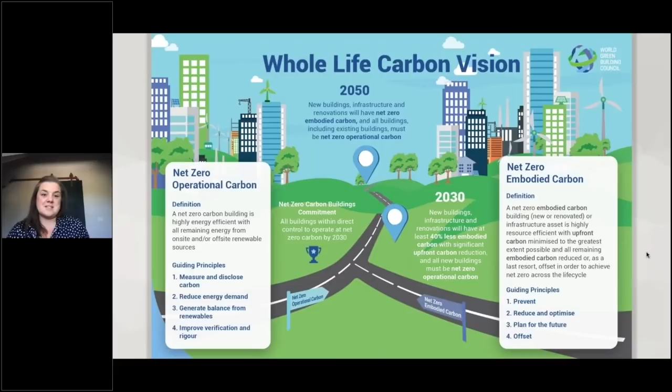Around the world, our green building councils are developing different tools, programs, and resources to help respond to this challenge, taking that framework and its guiding principles and vision and applying it in a way that's relevant to a particular market context—in terms of the types of initiatives, the metrics and target areas, and the terminology used as well.

For example, in the Netherlands there's this concept of Paris-proof, where organizations can ensure their buildings are fit for purpose and future-proofed against future climate scenarios in line with the Paris Agreement reduction targets. There's also LEED Zero from the US Green Building Council, which recognizes a balance of net zero in energy and carbon.

In Singapore, where it's really difficult to achieve all your renewable energy needs on site through solar panels, or to procure it off-site due to lack of availability and land space, they're approaching it through a super low energy concept—reducing the amount of energy consumed by the building as much as possible.

In other markets, they're taking a whole life carbon approach, such as the UK GBC's net zero carbon buildings framework, which ensures there are targets and standards for reducing embodied carbon. Similarly, DGNB from Germany has a climate positive certification program, requiring buildings to set a roadmap for achieving net zero for all associated emissions. But all of these programs work against that framework, so we're bringing in alignment and ensuring they have programs that encourage buildings and the sector towards net zero.

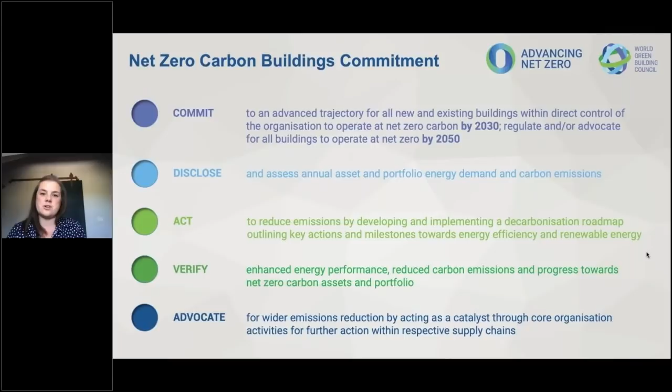We currently have 100 signatories to the commitment, with more being announced this week, and we have detailed guidance available on our website for those interested in signing up. Each organisation and government that signs up creates an action plan setting out the intention to achieve the different components I just set out. We use the Green Building Council network, their rating tools and guidance documents, to help support signatories in achieving their commitment goals.

I've mentioned embodied carbon briefly, and I want to carry on with a quick mention of why that's important. Globally, buildings are responsible for 39% of carbon emissions, broken into 28% for building operations, the use of buildings, and 11% from the construction industry for materials and construction processes in creating and maintaining those buildings. Building operations split into residential and commercial sectors, and into direct emissions created on site through on-site combustion, and indirect emissions from use of electricity from the grid.

That 11% from the construction industry is actually fairly small when considered against the total emissions from the concrete, steel, and aluminium sectors, which are over 22.7% of emissions on their own, broken down into roughly 11% for concrete, 10% for steel, and 1.5% for aluminium.

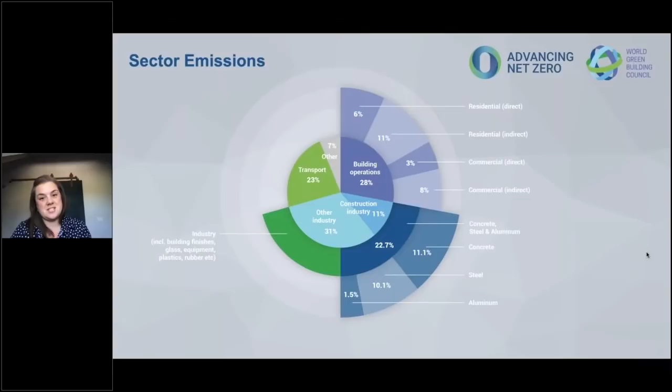Therefore, if we as the building and construction sector, an enormous procurer of these materials, can help create demand for low carbon alternatives, we can have a much greater impact on global carbon emissions than just the 39% our sector is already responsible for. So we will be introducing a whole life carbon commitment pathway to the commitment later this year.

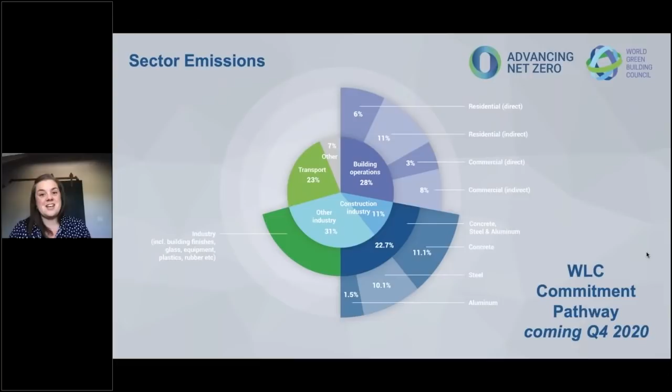This week, we're celebrating World Green Building Week with its theme, Act on Climate, through advancing net zero buildings. We're highlighting the action already being taken by businesses and governments around the world in advancing net zero buildings, and why net zero buildings are important for communities, for the planet, and for economies.

It is time to tackle the climate crisis, to rise to the challenge, to overcome the hurdles for a more resilient tomorrow, and net zero buildings are the solution. So this World Green Building Week, learn how we can take action across our sector, share the message about net zero buildings and the materials you can find on our website, and lead on climate action.

Show how you as an organisation or yourselves are advancing the sector towards a net zero future. Our web address is here for World Green Building Week, and we still have some time for you to get involved this week.

Going into more detail around the campaign: net zero buildings for communities. Net zero buildings support a healthier and more sustainable built environment, creating thriving and resilient communities, and when it comes to creating those communities, urgent action is long overdue. For the planet, buildings account for more than one-third of global carbon emissions. Net zero buildings dramatically reduce energy demand and use renewable energy sources. It's vital we prioritise net zero buildings today to protect our planet and future generations.

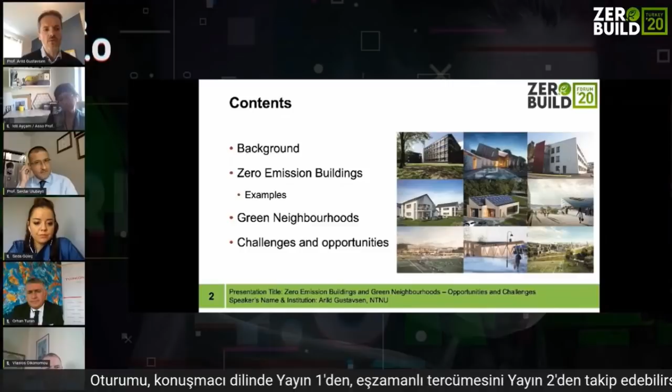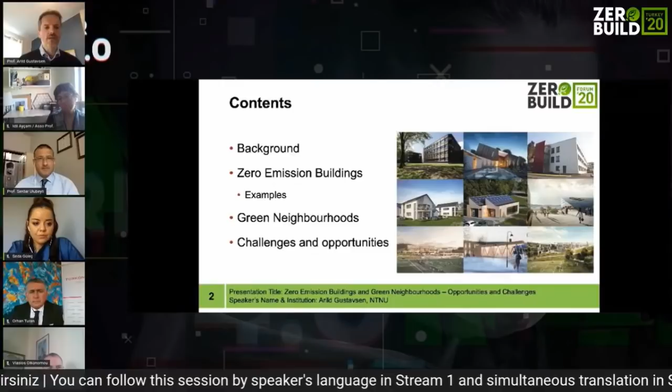The contents of my presentation: first I'll give a bit of background, which has partly already been introduced. I'll talk about the work we've been doing on zero-emission buildings and give a couple of examples, then touch upon green neighborhood concepts with some examples, and end with thoughts on challenges and opportunities.

So why do we work on zero-emission buildings and zero-emission neighborhoods? As presented earlier, buildings and the building construction sectors combined are responsible for 36% of global final energy consumption and nearly 40% of total direct and indirect CO2 emissions. The numbers vary from source to source, but if you include upstream energy and material production, it can be quite substantial anyway.

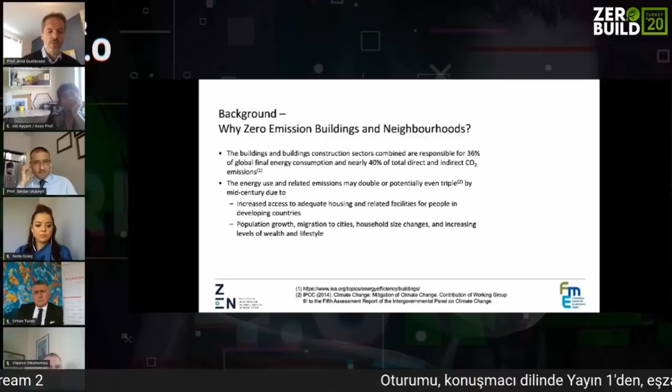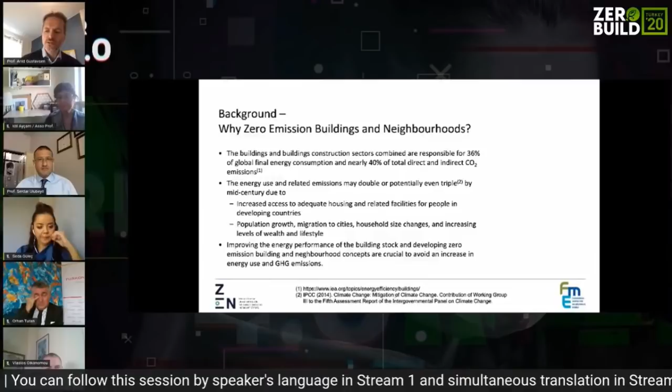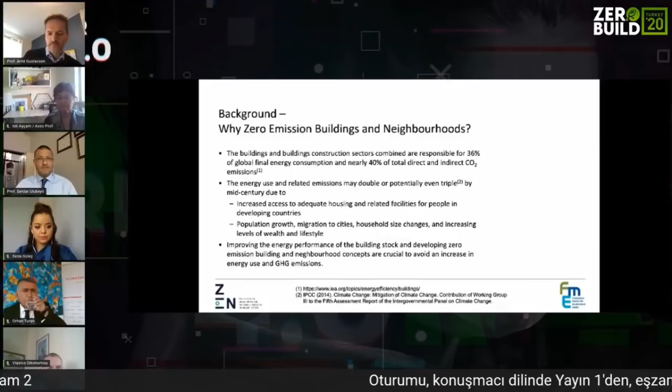We know the current numbers, but looking at the future, the energy use and related emissions may double or potentially even triple by mid-century. This is due to increased access to adequate housing for people in developing countries, population growth, migration to cities, household size changes, and increasing wealth and lifestyles. So improving the energy performance of the building stock and developing zero-emission building and neighborhood concepts are very important to avoid an increase in energy use and greenhouse gas emissions.

This relates a lot to the UN sustainability goals, and several are relevant here—for instance, affordable and clean energy for all. When you aim for a zero energy and zero emission concept, we know we need to invest in renewable energy production, usually close to the building, on the building site, or on the building itself.

We touch upon sustainable cities and communities. A lot of our buildings are in cities, and there will be an increase in the number of people living in cities. We need to increase the number of built houses in a sustainable way.

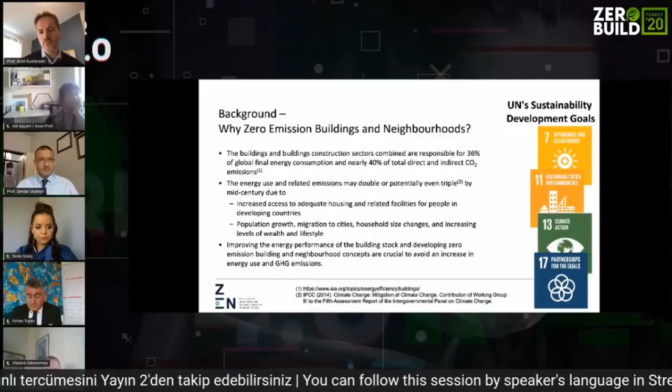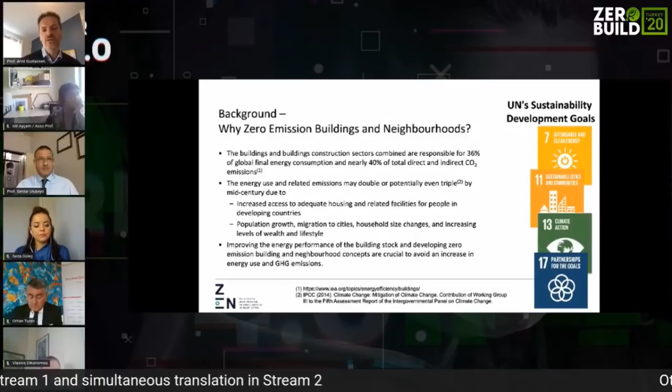And of course climate action—this connection is very clear—and also partnerships for the goals. Making one building includes partnerships across different disciplines, but making zero-emission neighborhoods or a sustainable city touches on very many areas like municipalities, consultants, the building sector, and the energy sectors. You need collaboration among all these actors to arrive at the wanted environmental ambition.

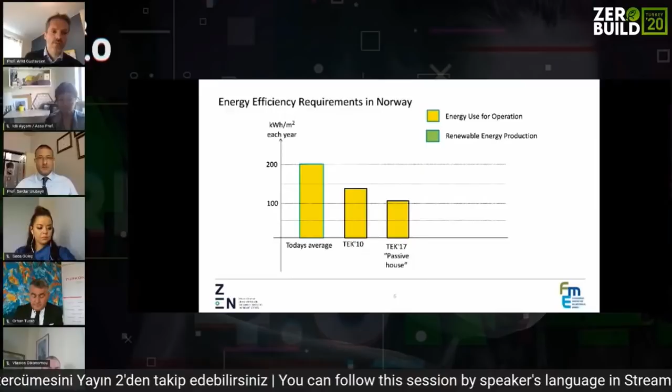Looking at what's going on in Norway, today's average energy use in buildings is around 200 kilowatt hours per square meter each year. The technical regulation in 2010 aimed for below 150 kilowatt hours per square meter per year. In 2017, we introduced what's called passive house level, close to 100 kilowatt hours per square meter per year. And in 2020, which is now coming to an end, we will soon have the nearly zero energy ambition level.

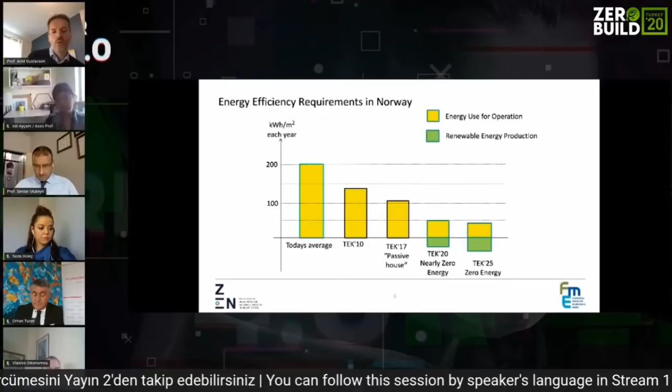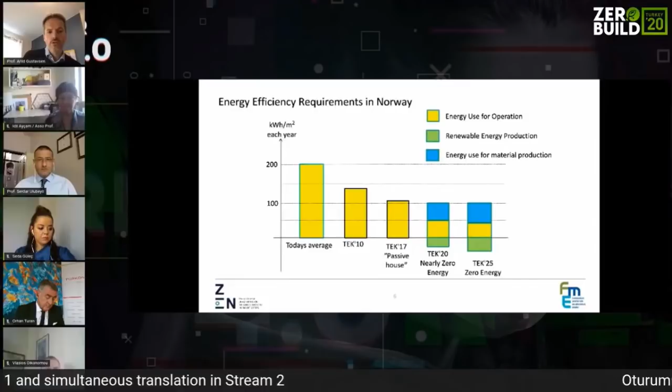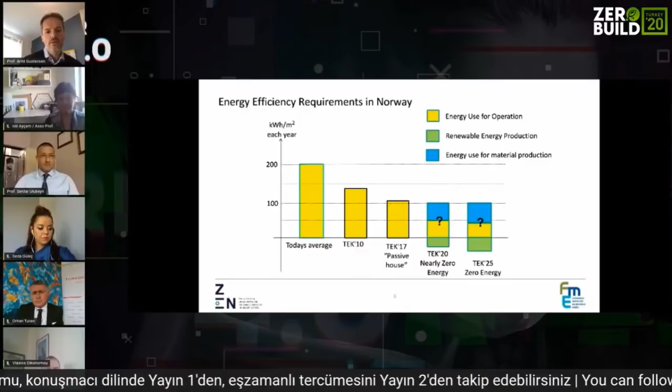...pointed by the European Commission, and maybe in 2025 we might end up with a zero energy ambition level. But so far, most of these requirements, at least in Norway, have been on energy use, usually only operational energy use. If you look at the energy used in making the materials, the picture might be a bit different. Still, at least in Norway, it remains to be seen exactly what these definitions will be, also for this year.

Since we think the embodied emissions, the energy use, and the emissions going into making the materials and constructing the building are just as important, we've been working on the zero-emission building concept. The main concept is that renewable energy sources produced or transformed at the building site have to compensate for CO2 emissions from operation of the building and for production, transport, and demolition of all the building materials and components during the life cycle.

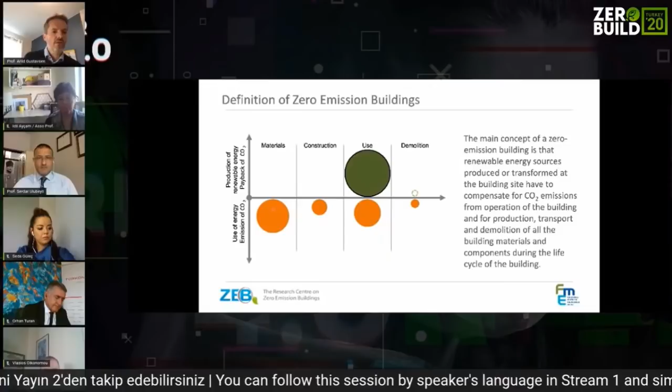That means emissions related to materials, construction, use phase, and demolition phase. For energy efficient buildings with renewable energy production integrated, like PV, we often see that the material emissions are of the same magnitude as the operational emissions, or that material energy use is on the same magnitude as the energy used for operation.

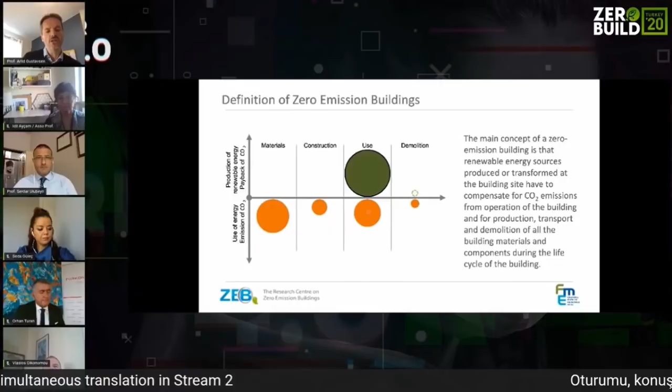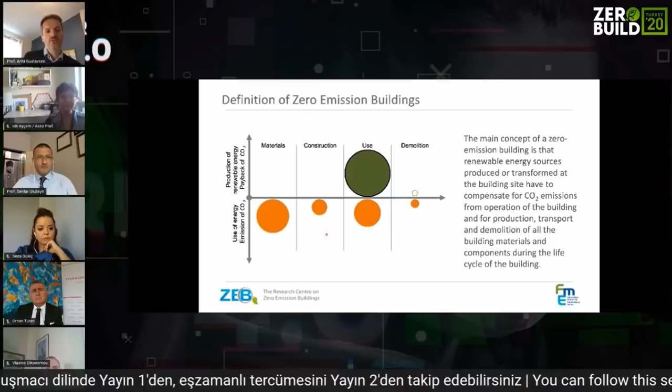So looking at the whole life cycle becomes really important to make sure we also work on the material side, the construction side, in addition to the operational side.

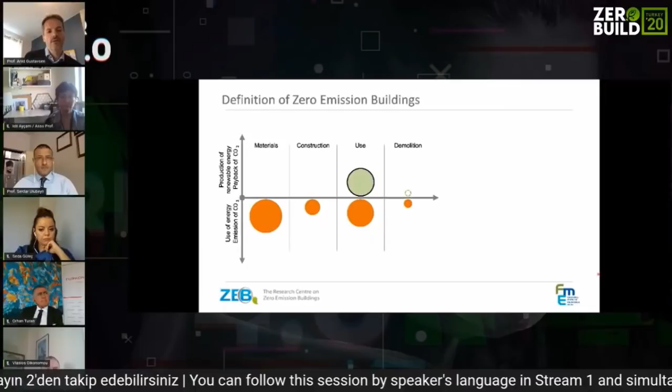We have developed different ambition levels. This is showing one of those, depending on how much renewable energy production we can have on the building. What's shown here is the zero emission building in operation, where we have renewable energy production of the same magnitude as we need for operation of the building.

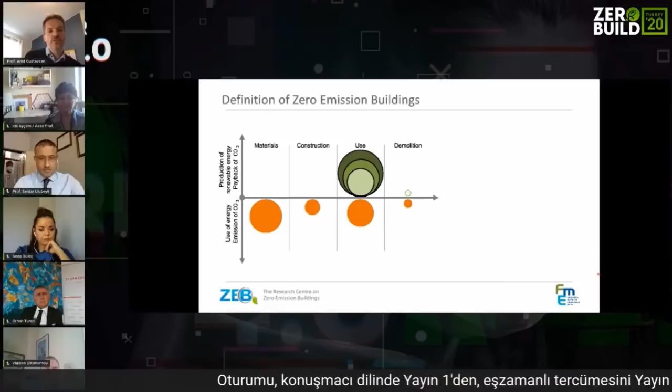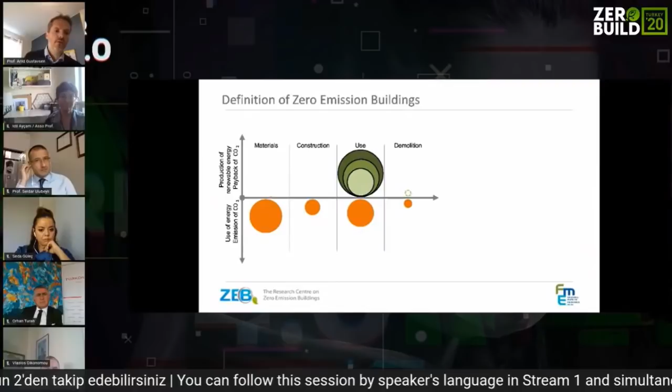If we're able to include more renewable energy production on the building or on the building site, we can have a more ambitious requirement. The ultimate aim is to have renewable energy production compensating for all the emissions related to the whole life cycle, including maintenance of the building.

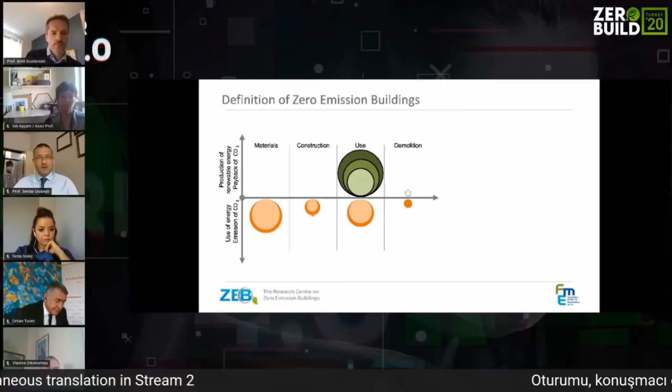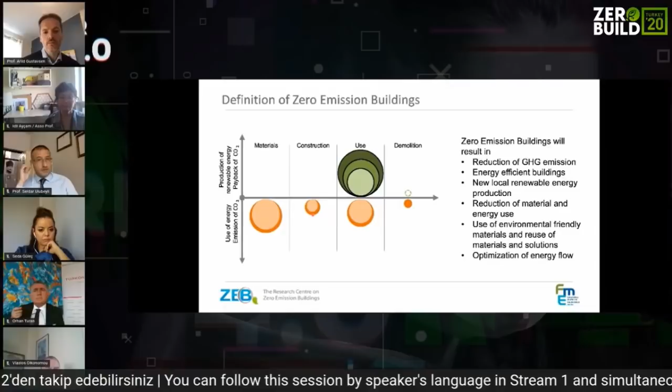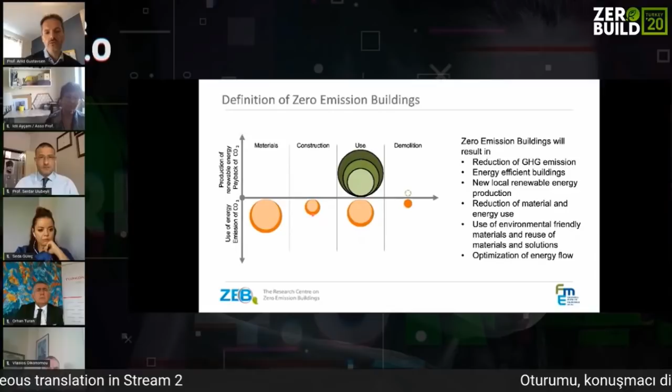So if you use this zero emission building definition, we will have a reduction of greenhouse gas emissions, energy efficient buildings, new local renewable energy production on the buildings or nearby, reduction of material and energy use, and also promote the use of environmentally friendly materials and the reuse of materials and solutions, and optimization of energy flows.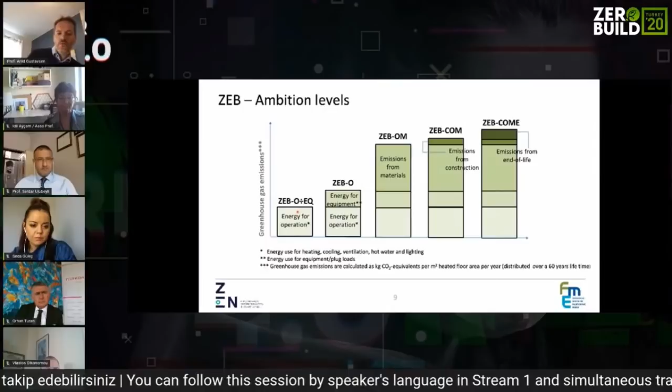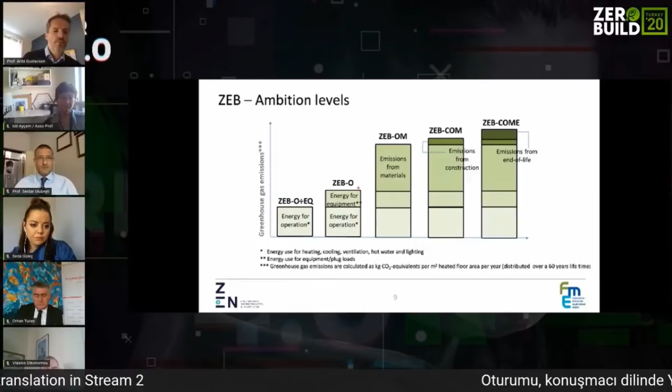This way of defining zero emission buildings also helps the construction industry improve the energy requirements or environmental requirements as they learn more about how to plan a building like a zero emission building.

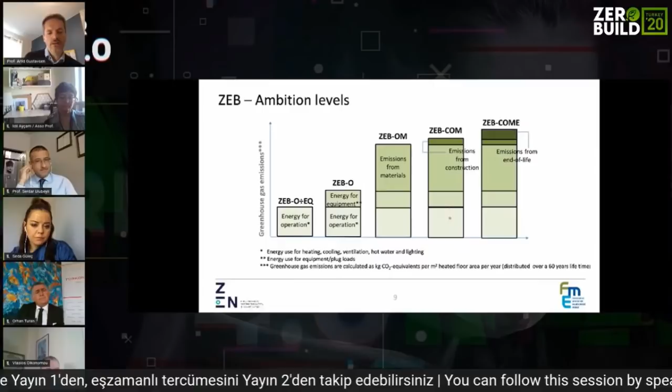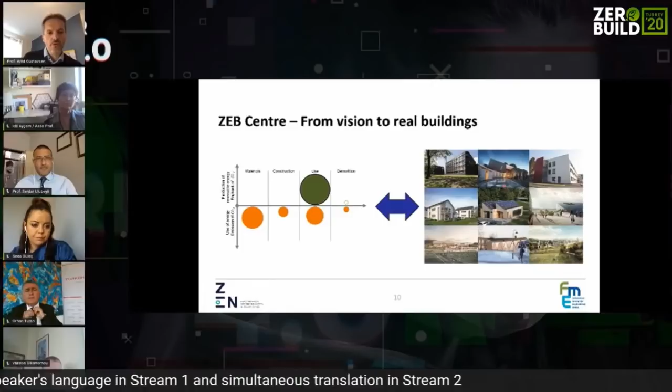This is not only theory, it's also applied in real demonstration projects. Right now we have been working with industry and developed 8 of the 9 projects shown here — office buildings, residential buildings, and school buildings. I will give two examples.

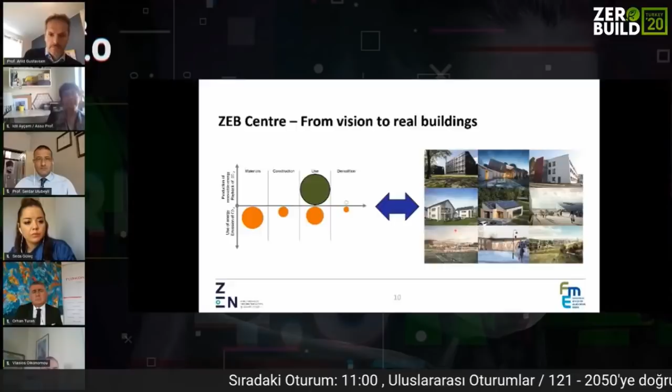The first is the ZEB pilot house in Larvik, south of Oslo in Norway. It's a demonstration building, designed by architect Snøhetta, with owners being a company dealing with technical systems for buildings. Looking at the ambition level here, it is zero emission buildings including operation and materials.

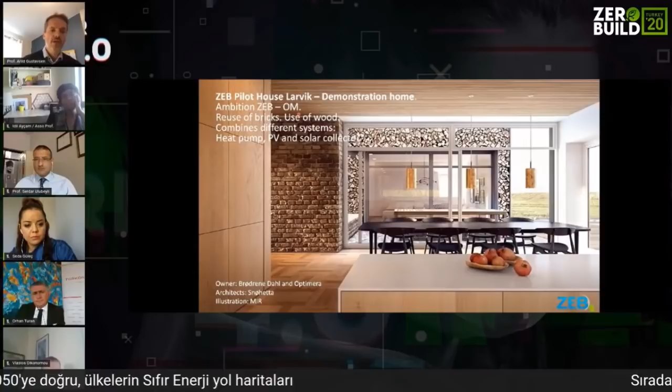To obtain this ambition level, they used a lot of wood and reused materials, for instance the bricks — I'll get back to that. In addition, they combined different systems: heat pump, photovoltaics, and solar collectors.

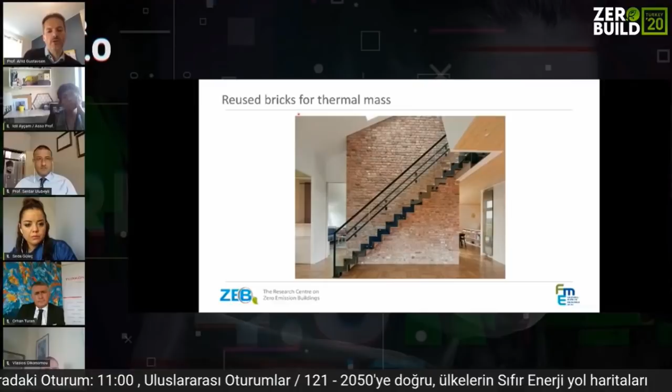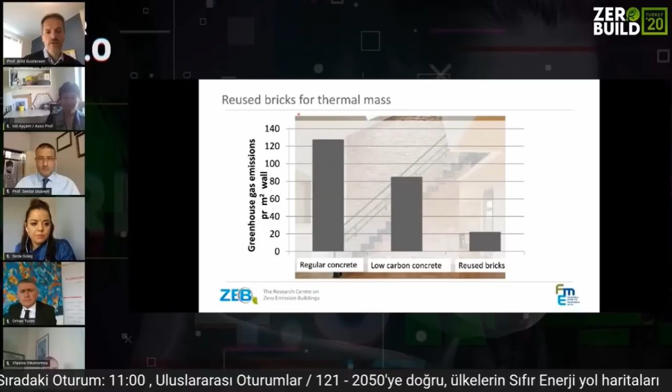For instance, the architect and owner wanted thermal mass in the building. The first concept was regular concrete added to the core of the building, but calculating toward the zero emission building operation and material emission level, they found this contributed too much to the material emissions. They then looked at low carbon concrete as an alternative, but in the end used reused brick sourced from a barn nearby that was being taken down anyway.

In this way, by focusing on emissions during the whole life cycle of the building, they managed to reduce the emissions to the environment.

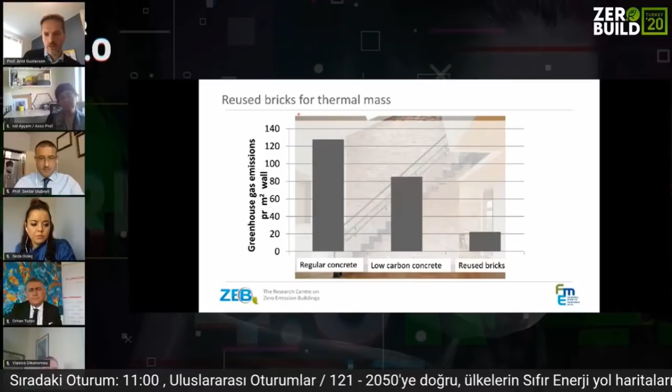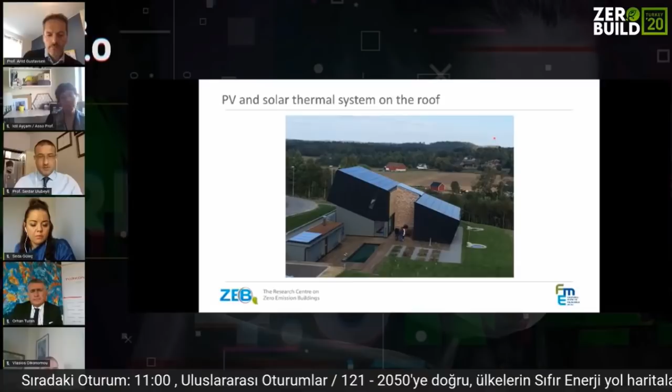This needs to be like this because we have to compensate during the lifetime of the building. In the calculation procedure, we define the lifetime of the building, or the life cycle time, as 60 years.

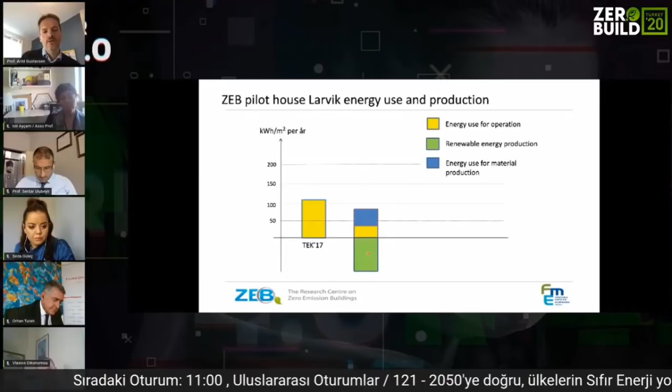Another building, this was a renovation project of an office building from 1980. It originally had an aluminum facade with a lot of glass.

After renovation, they ended up having more wood in the facade and burnt wood to take down the embodied emissions further. All in all, they here aimed for what they call a zero emission building with operation and materials, taking out the user equipment. So here they used exposed concrete as thermal mass to limit the temperature fluctuations.

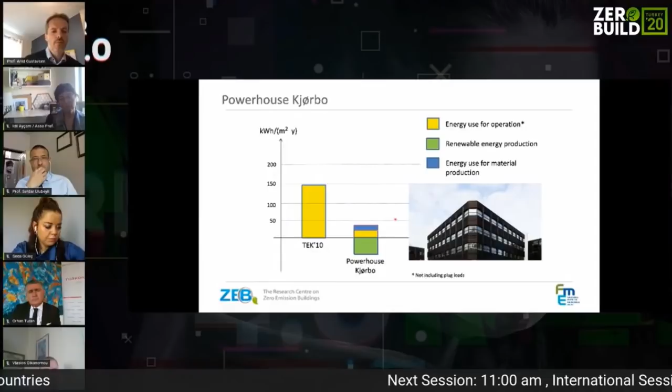They have a lot of photovoltaics on the roof, both on the roof of the building itself, but also on part of the parking garage that belongs to the building. In this way, they're able to produce enough renewable energy to compensate for operation of the building and also for taking into account the materials.

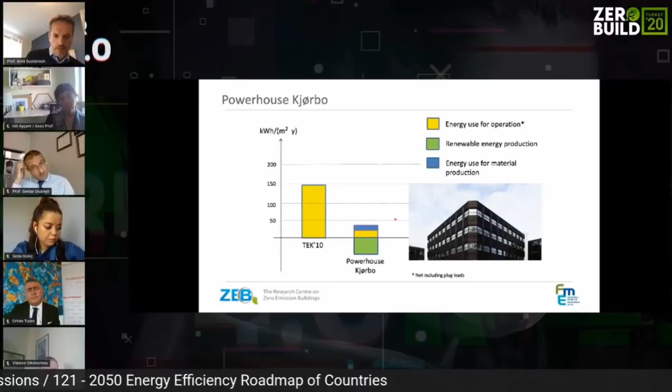That was two examples. Then I will show two slides showing what the result can be if we implement zero emission buildings in the technical regulations and look at scenarios towards the future.

This graph shows the built square meter floor area in the Norwegian building stock, starting at 2020 and looking into the future to 2050. We see that there will be an increase in the built area over the next 30 years.

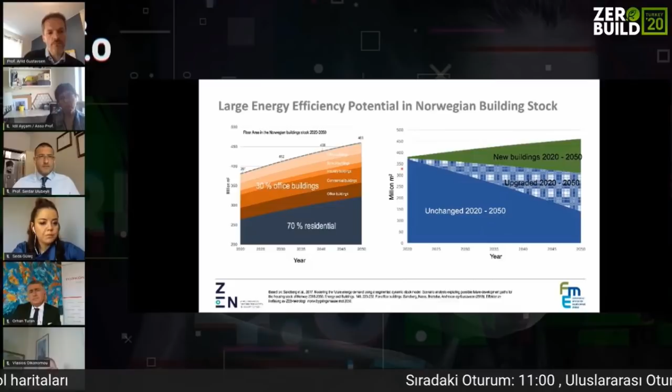If you look at what this will do to the building stock, some of these buildings will be unchanged because they are new or built quite recently, some will be upgraded, and some will be new buildings built according to the technical regulation at different future times. Then we can calculate the energy performance of the whole building stock into the future.

We did that by looking at three scenarios: a baseline scenario using the current energy performance requirement and improving it slightly; a ZEB scenario where we implemented some of these zero emission building concepts into future energy requirements; and also a really ambitious scenario.

If we see at the results, we can see that energy use in the Norwegian building stock can be almost 40 terawatt hours less in 2050 compared to 2020. The ZEB definition itself that we have proposed can contribute 31 of those 39 terawatt hours.

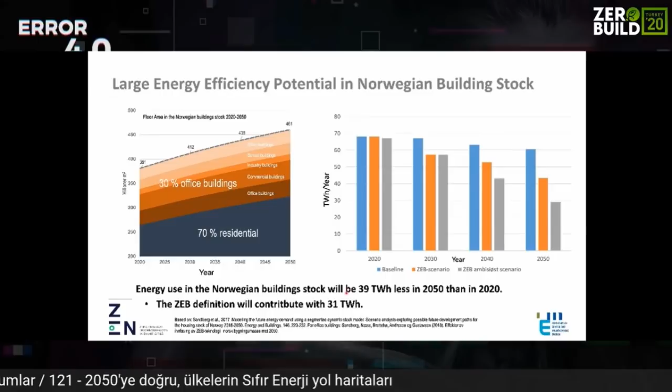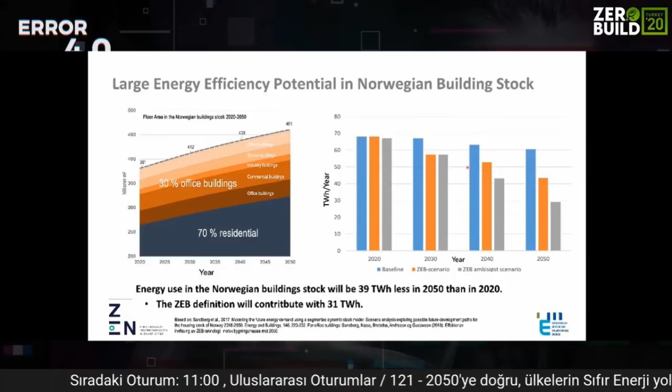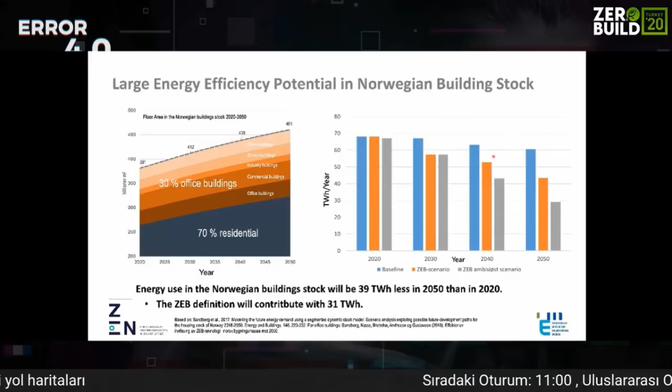There is a big energy efficiency potential and also a potential for implementing renewable energy technologies in the building stock. Even with an increasing population and increasing built floor area, we can have a substantial reduction. This freed up energy can be used in other sectors like the transport sector, if we electrify the transport sector, moving from fossil fuel to electricity, or it can also be used in other areas.

And then I changed to the neighborhood scale. I think I have 2 or 3 minutes left.

Recently, in 2017, we started to work on the neighborhood scale, because we see that working on one individual building might not be optimal. It's better to look at a group of buildings and to look at synergies. Today, we usually cool one building while we can heat the neighboring building. So the best thing would be to use the surplus heat in the building where you need this heat.

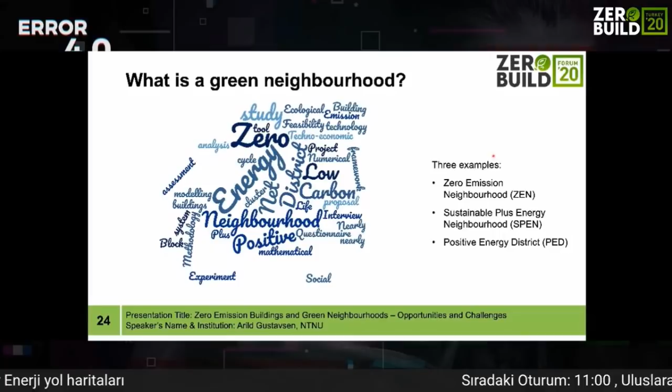So I'll just show briefly 3 examples of how this can be defined. One is coming out from the Zero Emission Neighborhoods Center, where we have developed this research center definition.

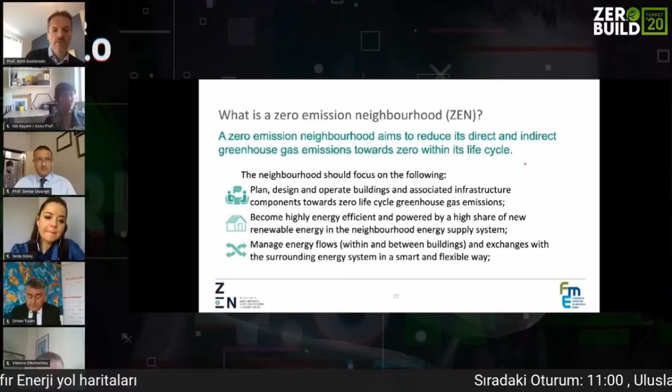Instead of having a zero emission building ambition, building for building, we have an ambition of having a zero emission neighborhood. We still look at the direct and indirect greenhouse gas emissions throughout the life cycle of the building. We aim to have zero life cycle greenhouse gas emissions. The neighborhood should become energy efficient and powered by a high share of new renewable energy.

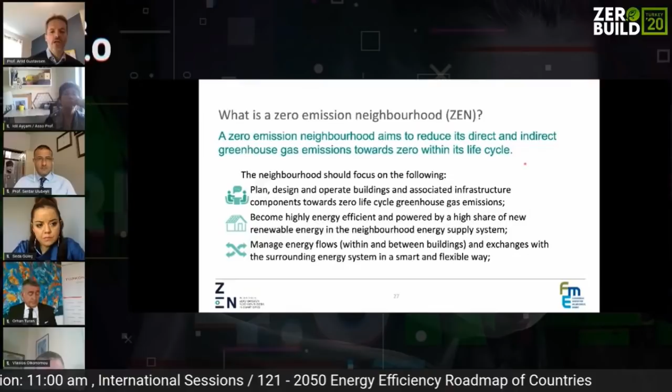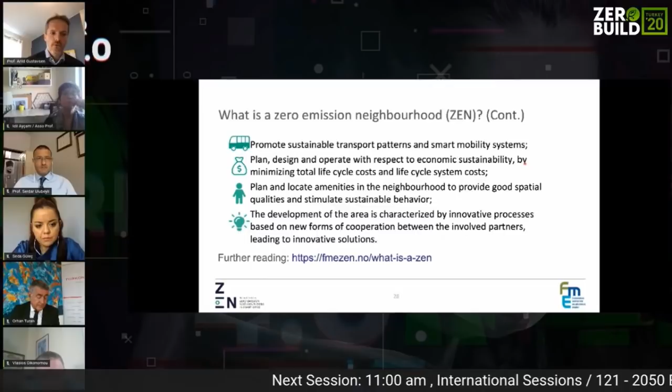The neighborhood energy supply system needs to manage the energy flows and also exchange energy with the surrounding system in a smart and flexible way. We should promote sustainable transport patterns and smart mobility systems. We should plan, design and operate with respect to economic sustainability, and locate amenities in the neighborhood to provide good spatial qualities and stimulate sustainable behavior. We need to have the users, or citizens, of these neighborhoods with us, of course.

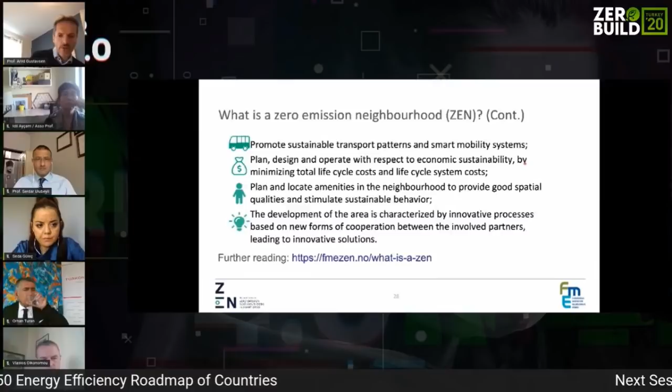We should also look at innovative processes as part of this. So we're now testing out this definition in several areas in Norway, working with municipalities and property developers. I also have two other examples, one connecting to an EU project.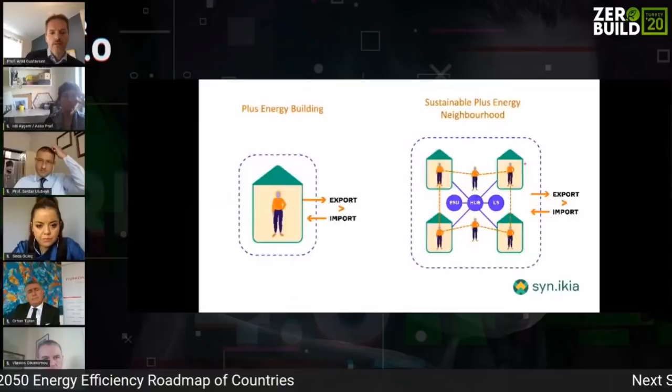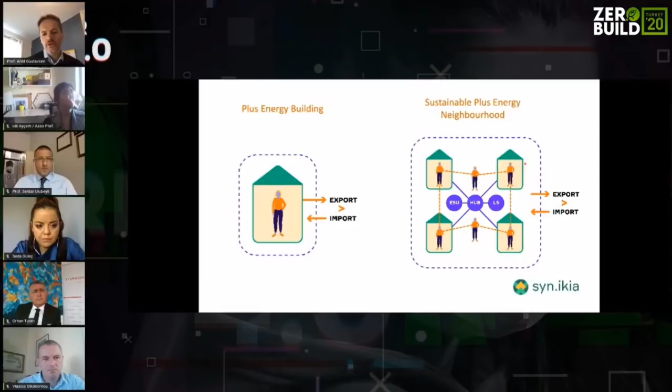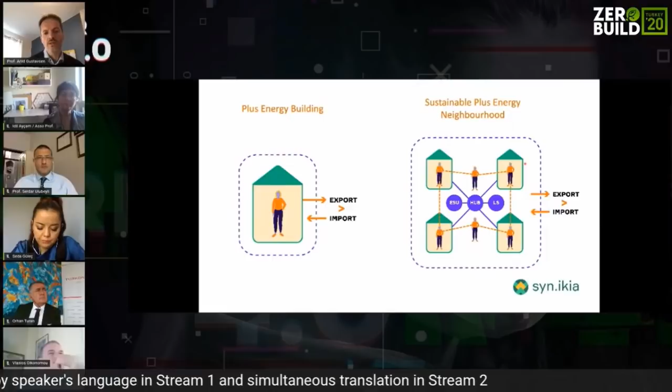Here the main mission is to increase the share of sustainable neighborhoods with surplus renewable energy. The focus is on energy, but instead of looking at the individual building, we also look at the neighborhood scale. Then you can have neighborhood storage systems or neighborhood energy supply units, and exchange of energy and control of energy use among the buildings. The export of energy then needs to be larger than the import to obtain the ambition level.

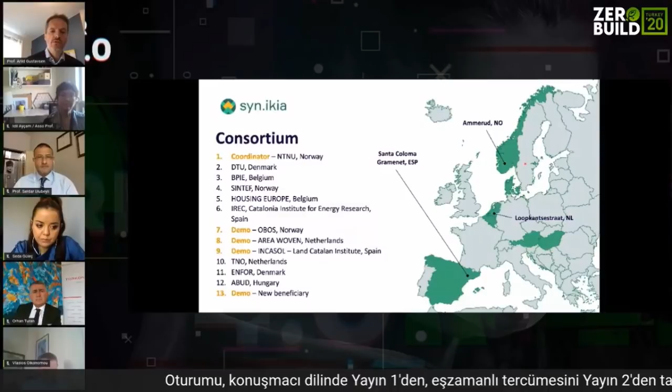This project is also working towards real demonstration cases, one in Norway, one in the Netherlands, one in Spain, and one in Austria.

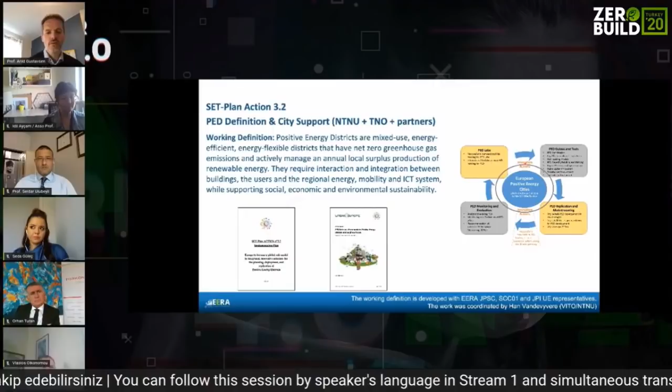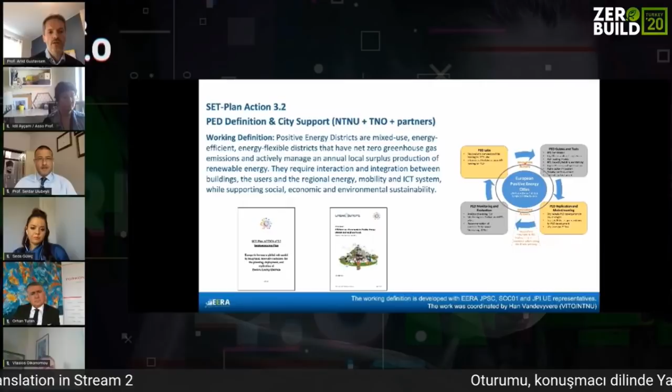Finally, one example is coming from the Strategic Energy Technology Plan, and one of the topics covered there is smart cities and communities. The aim is to support planning, deployment, and replication of 100 positive energy districts by 2025. If you look at the details, the definition touches upon several of the same topics as we saw for the Zero Emission Neighborhood Research Center: mobility, energy, renewable energy, smart controls, and it should also support social, economic, and environmental sustainability.

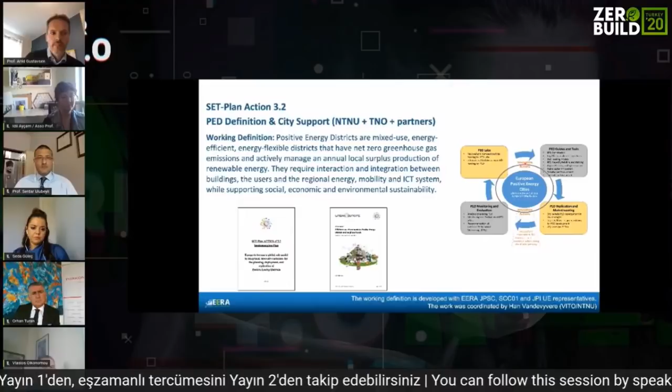I think I've almost used my time. Final slides. But there are, of course, several challenges when realizing green neighborhoods. We are working with different parties in the neighborhood - for instance, owners and developers - and these actors will have different environmental ambitions. So this is a challenge.

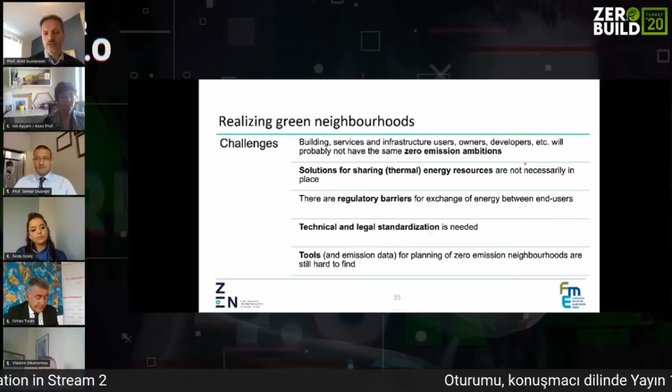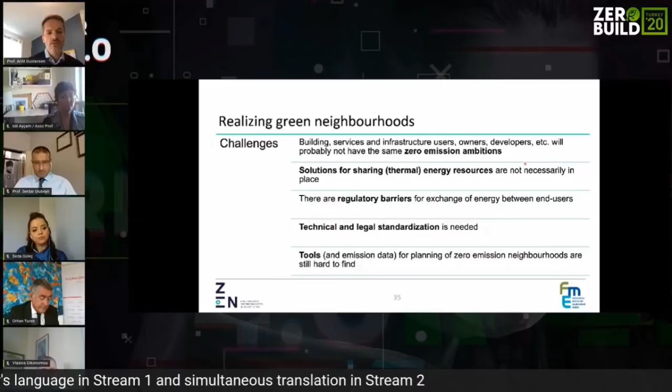Also, there are not systems in place for sharing energy sources like electricity. You can easily share as long as the policy measures are in place, but thermal energy is not that easy if it's not there from before. There are also a lot of regulatory barriers in place, and we see that even in Norway for exchange of energy between end users. Technical and legal standardization is also needed to make this happen.

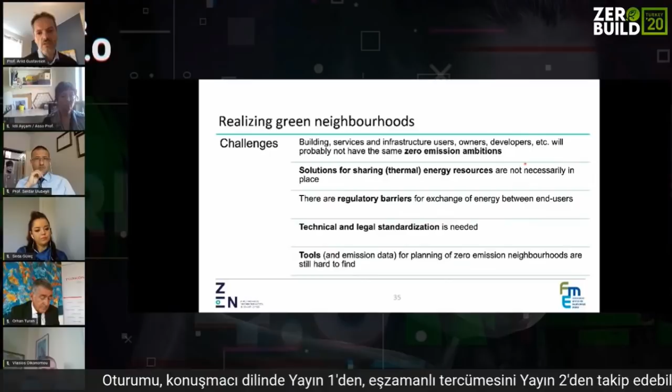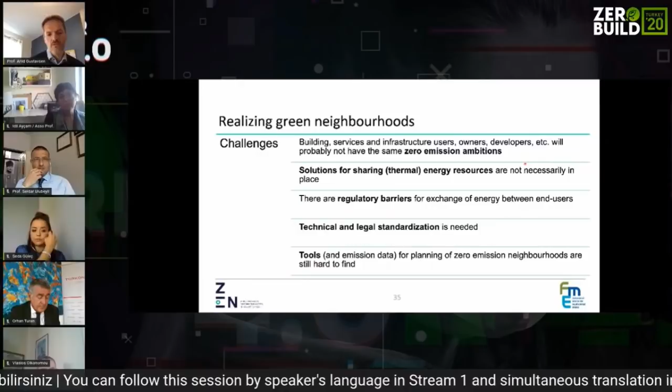Also, the tools for calculating greenhouse gas emissions are not easy - they're not easily available at the moment. We start to get a lot of data for buildings, but for infrastructure and energy systems it's still lacking to a certain extent. But at the same time, there are a lot of opportunities.

We can optimize the energy use and renewable energy production among different buildings and also toward the energy system. Focusing on the neighborhood instead of individual buildings makes sure emissions related to infrastructure - like grids, technologies for water, sewage, waste, and mobility - are also considered. So it's not only the building, but you take into account infrastructure connecting the buildings.

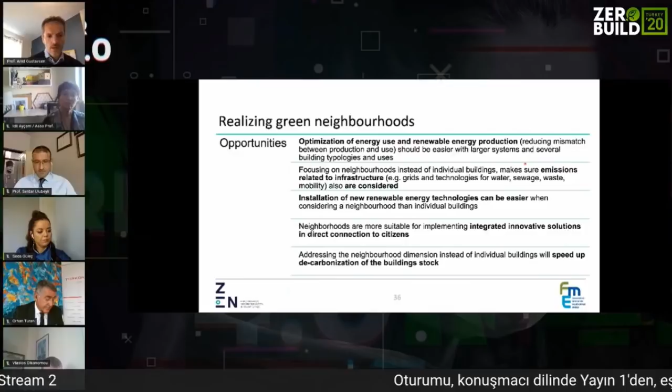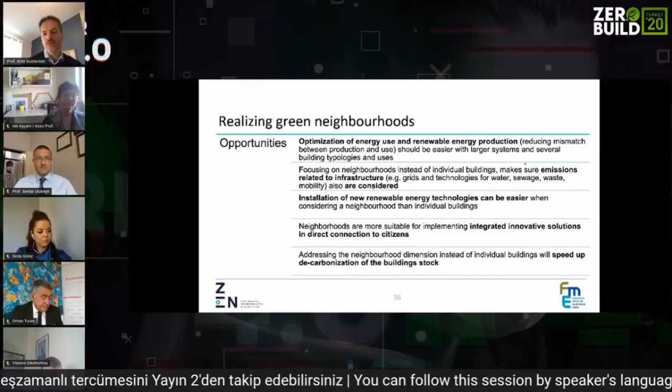Installation of new renewable energy technologies can be easier than limiting it only to the building itself. Working with a neighborhood, we also get easier access to a group of people - the people living in the neighborhood. Finally, addressing the neighborhood scale instead of individual buildings can make it possible to speed up the decarbonization of the building stock, and that is really needed.

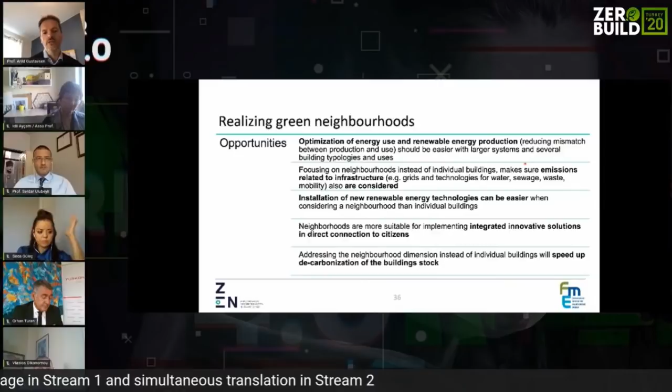But as I said, there are also some challenges, so we need to work on those to overcome and manage the transition to a more sustainable built environment. That was the last slide, so thank you.